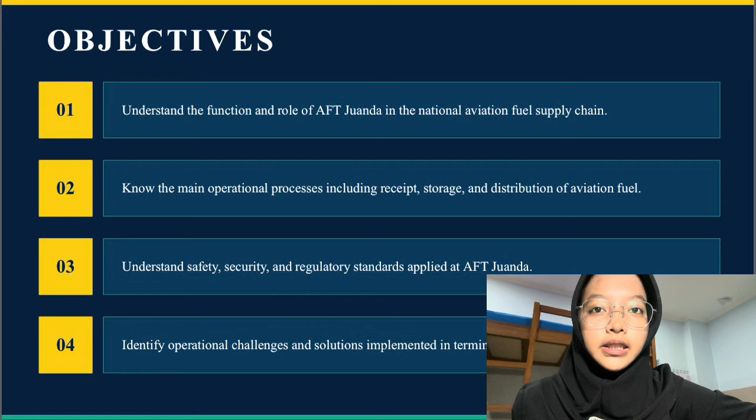And then objectives. The first is understand the function and role of AFT Juanda in the national aviation fuel supply chain. Secondly, know the main operational processes including receipt, storage, and distribution of aviation fuel. Third, understand safety, security, and regulatory standards applied at AFT Juanda. And the last is identify operational challenges and solutions implemented in terminal management.

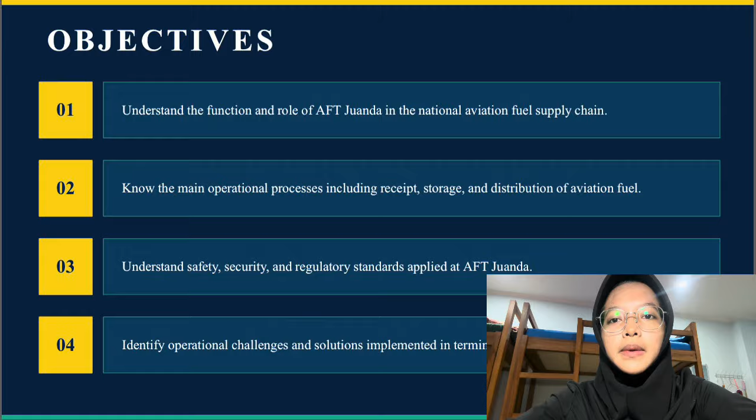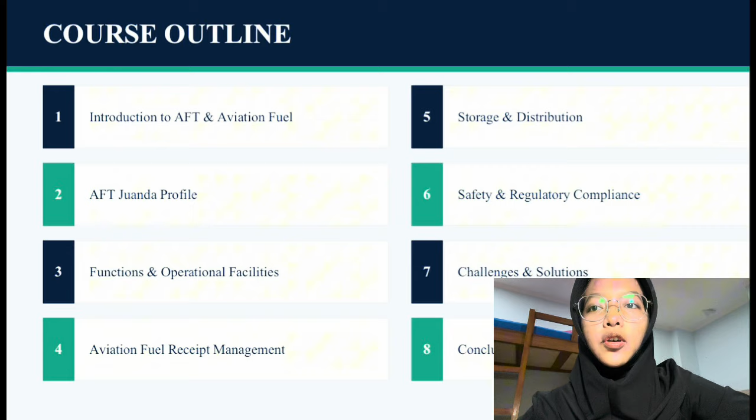Next, course outline. First, introduction to AFT and aviation fuel. Second, AFT Juanda profile. Third, functions and operational facilities. Fourth, aviation fuel receipt management. 5. Storage and distribution. 6. Safety and regulatory compliance. 7. Challenge and solution. 8. Conclusion. Next,

Introduction to AFT and aviation fuel. What is AFT? AFT is an aviation fuel terminal. It's a ground facility that receives, stores, and distributes aviation fuel to airlines. AFT is a critical link in modern airport operation and must meet international standards such as IATA, JIG, and ASTM.

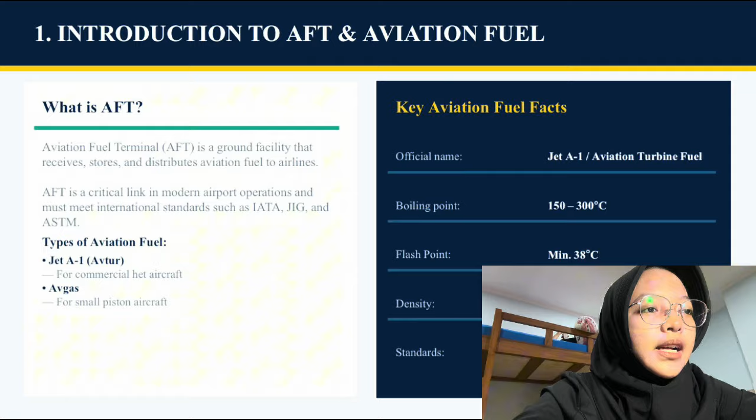Types of aviation fuel. First, Jet A1 Avtur for commercial jet aircraft. 2. Avgas for small piston aircraft. And then key aviation fuel facts. Official name Jet A1 or aviation turbine fuel. Boiling point 150 until 300 Celsius. Flash point min 38 Celsius. Standard DEF STAN 91-91.

Next, AFT Juanda profile. About AFT Juanda. Managed by PT Pertamina Patra Niaga as a DPPU unit, aircraft fuelling depot, serving all domestic and international airlines that operate in Juanda. Then, using a refueling system with a fleet of tank cars and hydrant system. And then, storage tank capacity of tens of millions of liters of Avtur. Applying strict quality control standards according to IATA and JIG. Located in a restricted area with high security.

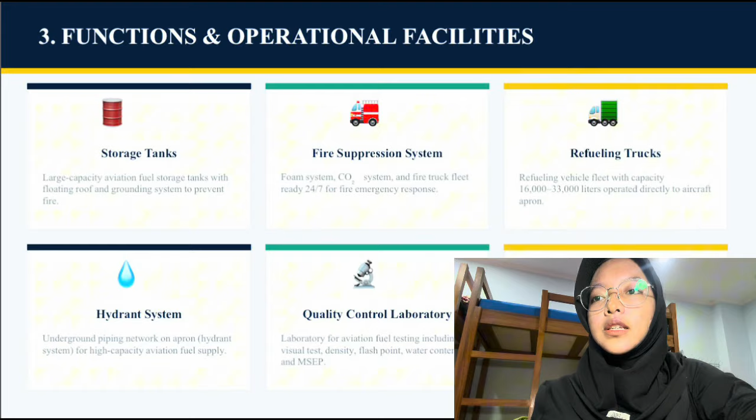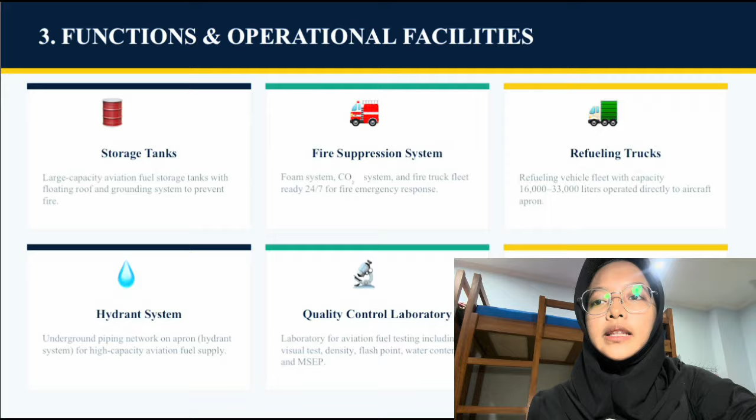Function and operational facilities. First, storage tanks. Large capacity aviation fuel storage tanks with floating roof and grounding system to prevent fire. Fire suppression system. Foam system, CO2 system, and fire truck fleet ready 24 hours for fire emergency response. Refueling trucks. Refueling vehicle fleet with capacity 16,000–33,000 liters operated directly to aircraft apron. Next,

Hydrant system. Underground piping network on apron hydrant system for high-capacity aviation fuel supply. Quality control laboratory. Laboratory for aviation fuel testing includes visual test, density, flashpoint, water content, and MSEP. The last is monitoring system. SCADA, an automatic system for real-time monitoring of tank level, flow rate, and pressure.

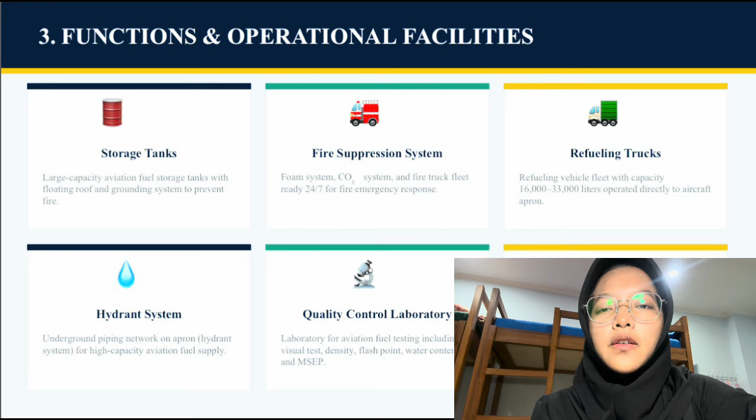Next, aviation fuel receipt management. 1. Ordering: aviation fuel order submitted to supply chain based on demand forecasting. 2. Arrival. Aviation fuel arrives via tanker ship, truck, or pipeline from refinery. 3. Inspection. Visual inspection, seal checks, and document verification before unloading. 4. Quality testing. Sampling and lab analysis, density, flashpoint, water content.

5. Transfer. Aviation fuel pumped to storage tank after passing QC. And the last is recording. Documentation of volume, batch, and QC data entered into system.

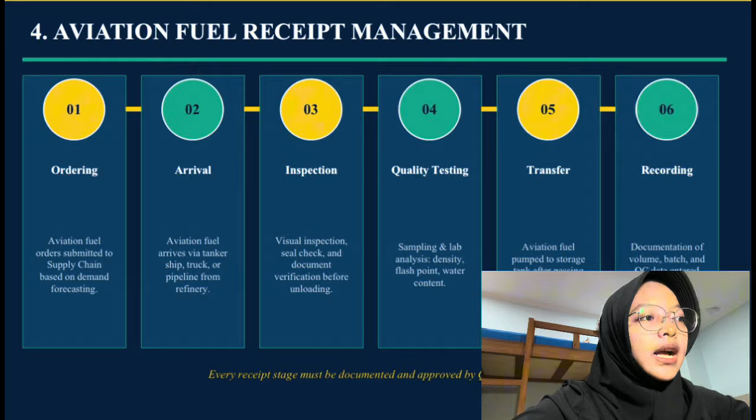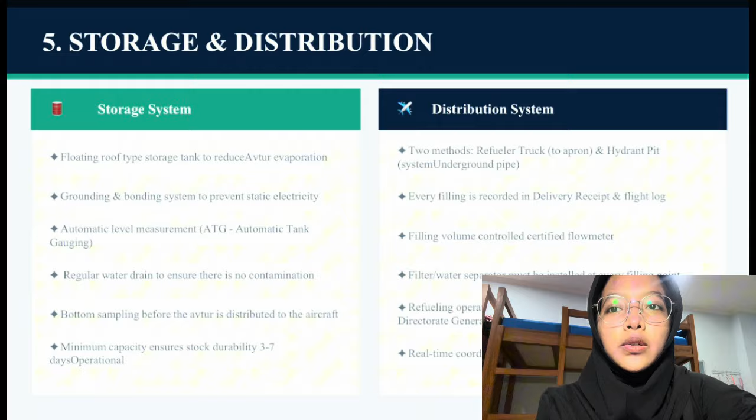And then there is a storage system. In storage system, there is a floating roof type storage tank to reduce Avtur evaporation, and grounding and bonding system to prevent static electricity. Automatic level measurement, ATG, automatic tank gauge. Regular water drain to ensure there is no contamination. Bottom sampling before the Avtur is distributed to the aircraft. Minimum capacity ensures stock durability 3 until 7 days operational.

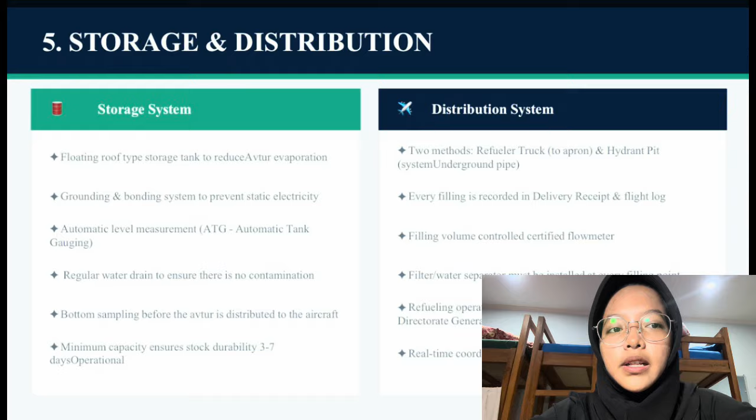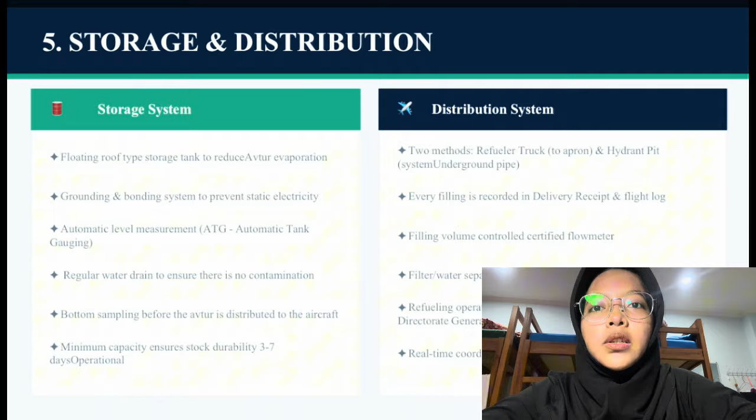There is a distribution system. In distribution system, there are two methods: refueler truck to apron and hydrant pit system underground pipe. Every filling is recorded in delivery receipt and flight log. Filling volume controlled by certified flow meter; filter or water separator must be installed at every filling point. Refueling operator must have a special certification from the Directorate General. Real-time coordination with airline and ground handling.

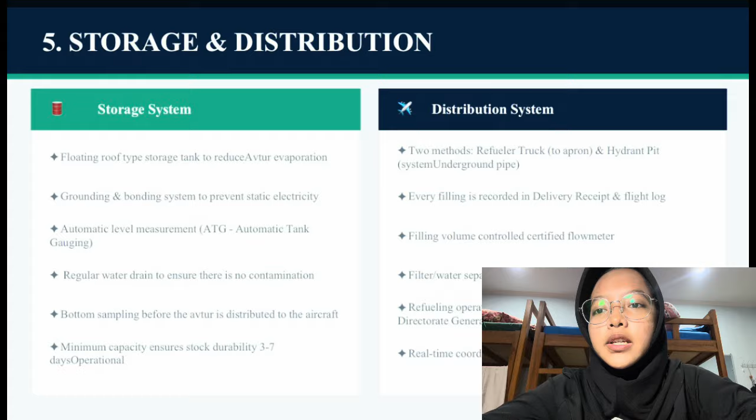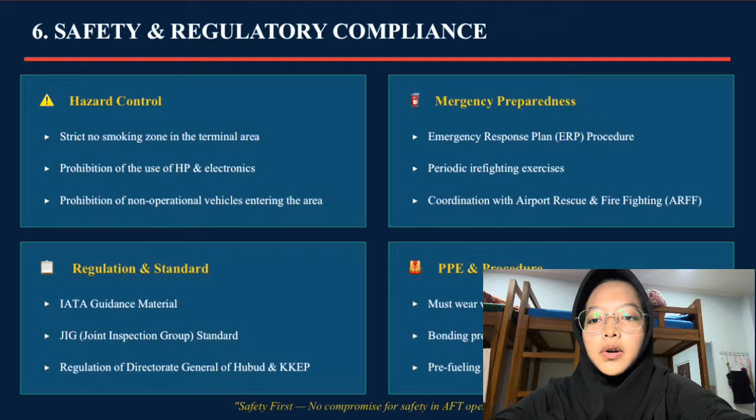Next, safety and regulatory compliance. Hazard control. Strict no smoking zone in the terminal area. Prohibition of the use of HP and electronics. Prohibition of non-operational vehicles entering the area. Second, emergency preparedness. Emergency response plan, ERP procedure. Periodic firefighting exercise. Coordination with airport rescue and firefighting,

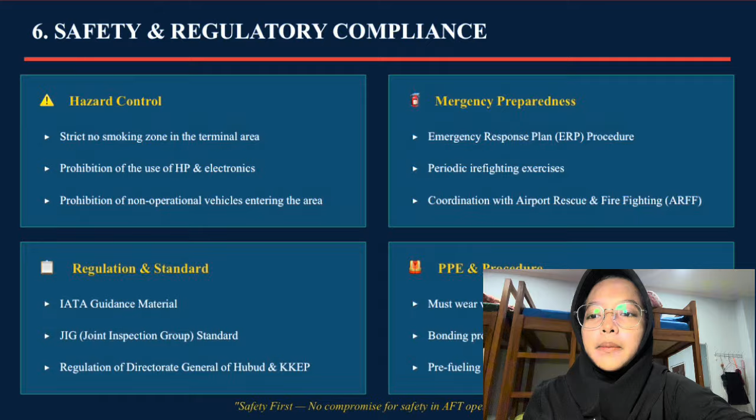ARFF. 3. Regulation and standard. IATA guidance material. JIG Joint Inspection Group Standard. Regulation of Directorate General of Hubud and KKEP. 4. PPE and procedure. Must wear vest, helmet, and safety shoes. Bonding procedure before filling. Pre-fueling checklist must be filled out.

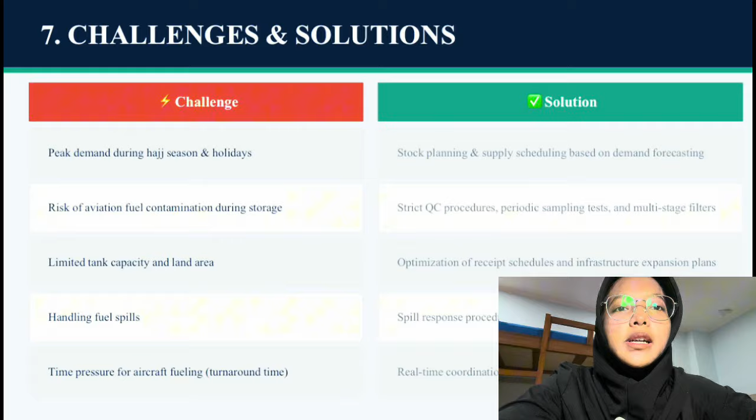Strict QC procedure, periodic sampling tests, and multi-stage filters. Optimization of receipt schedules and infrastructure expansion plans. Spill response procedures, bund walls, and oil trap drainage. Real-time coordination with airlines and process digitalization.